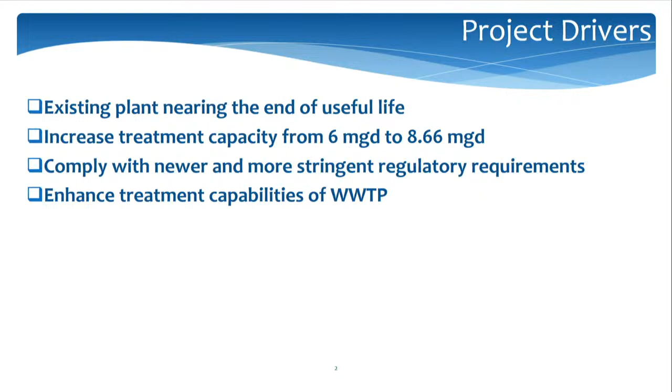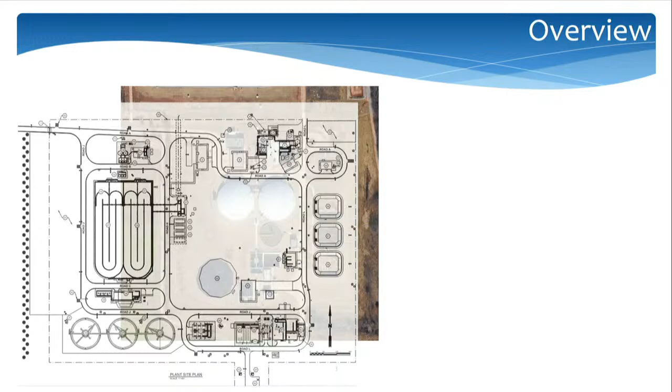And this, I think, was from about 2 or 3 months ago from Google Earth. It shows you that they've already started moving dirt, and you can see, if it'll show right here, the future aeration basins are already doing ground improvements there, and then making progress on headworks at this area. So that's a general overview.

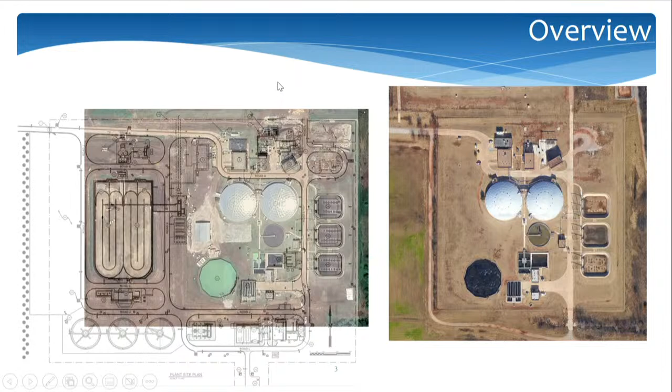Just a reminder, the engineer is CP&Y, now doing business as STV. The contractor is Crossland Heavy, and after making the value engineering adjustments, the total construction cost is estimated at just over $191 million. The project is going to last about 1,600 days. It's right at, I think, close to 5 years. We awarded the project in July.

They started last August, and the phase 1 milestone, which is in the contract, really coincides with bringing the new treatment processes online and being able to take effluent to the new discharge point. Phase 2 coincides with decommissioning and demolishing all the processes that are going to be abandoned. So the real major milestone is that first phase, where we actually bring the new treatment plant online.

So just a general update as of the first week of September through 12 pay applications. We've had about $42 million so far in progress payments, and we're tracking in terms of completion percent in dollars and completion percent in time overall. So the project's moving forward pretty well. We'll go through some pictures.

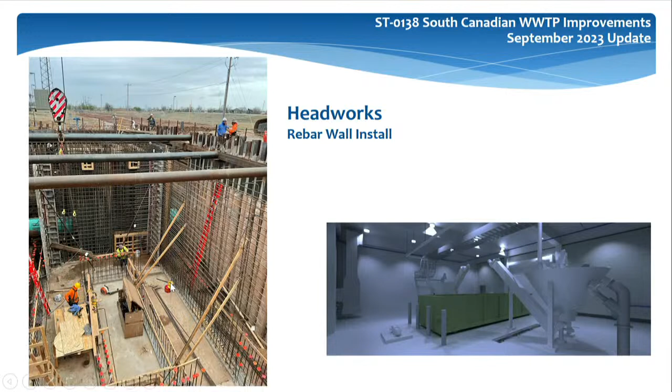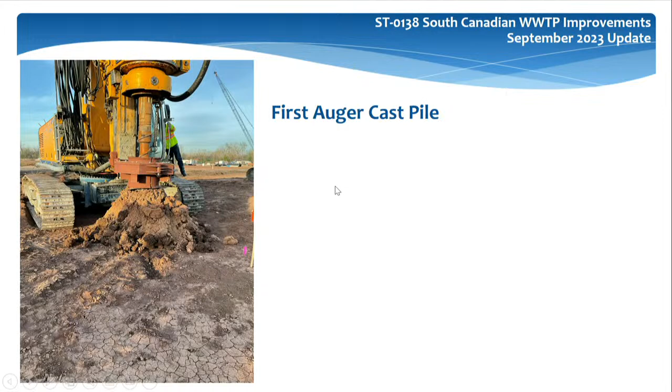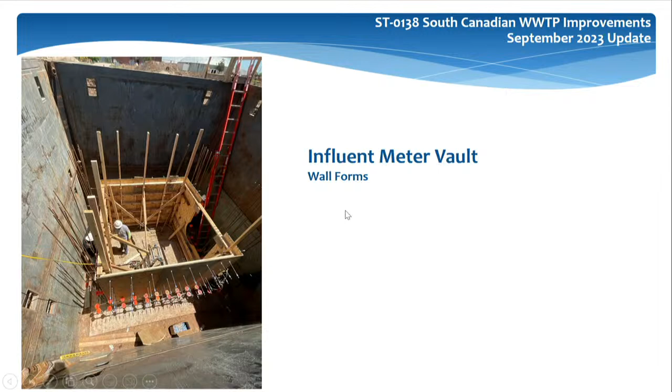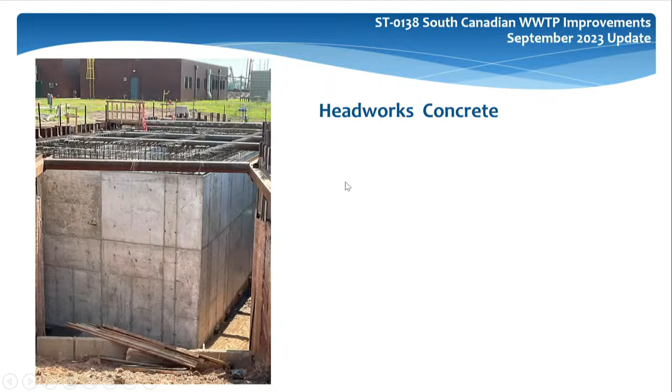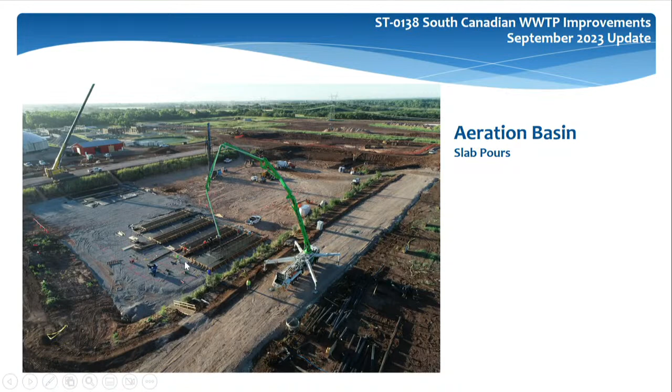And then this is headworks coming up out of the ground. They had poured concrete, and they were doing leakage testing as of a couple weeks ago, so the headworks should be moving along pretty well. Here shows the aeration basins, which I showed on the aerial. They had to do some preload of around 6 months, and now they're proceeding with the rest of the ground improvements. You can see here they're starting to pour concrete slabs.

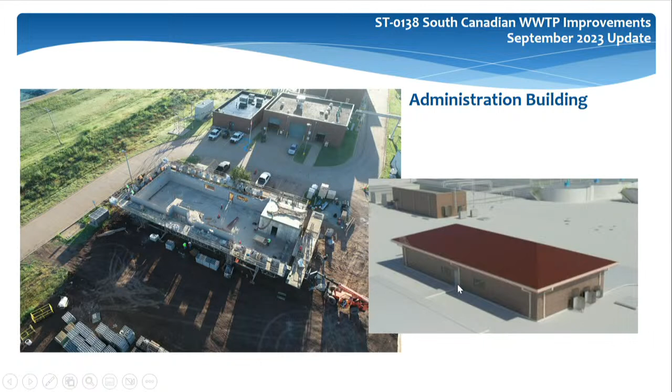This is the future administration building. On the right shows a rendering that was prepared during design, and this shows they've got the slab or the foundation poured, and they're starting to bring the masonry up out of the ground. So this will be neat as we move forward, to be able to show you how it compares to what we had in the design renderings.

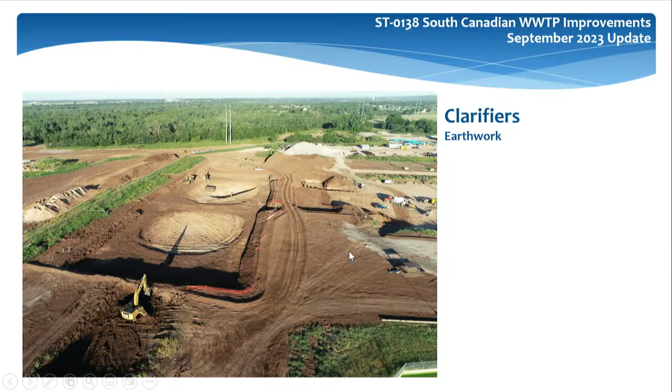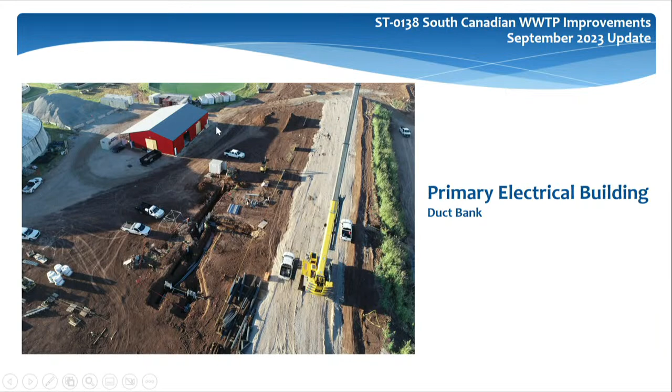These are the future clarifiers, really just earthwork at this point. They had prepped the area and got it loaded to stabilize the ground from settling before they actually started pouring foundations. The primary electrical feed to the plant is going to be coming in here, so this is the new duct bank and where a lot of the gear is going to be located.

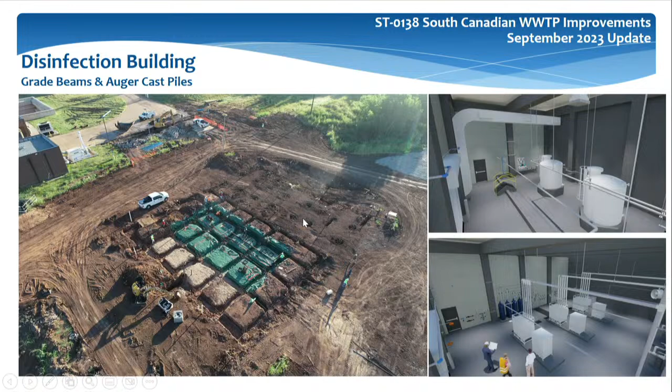This is for the new disinfection building. It's really at this point just ground improvements, getting ready to pour the grade beams, and they've done some installation of piles in this area to provide additional support. And then this was an overall view.

I just want to thank Crossland and CP&Y, or STV. Crossland provided a lot of the aerial drone type photos, and CP&Y, STV provided a lot of the first person point of view of actual construction. So with that, if there's any questions.

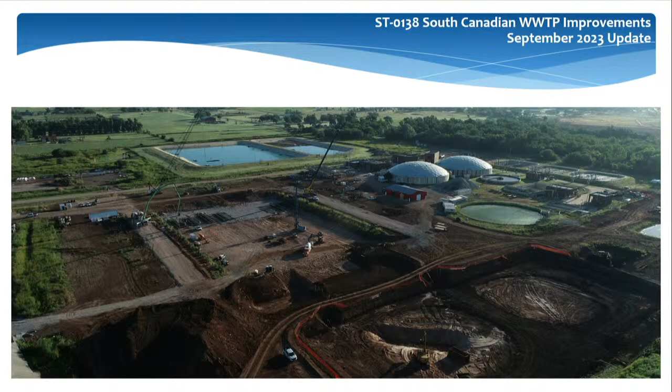I don't think I've ever been involved in a construction project that takes 5 years. It's a long one. All right. Other questions? Thank you, Will.

Thanks, Will. Next item is status report on the second Atoka pipeline. Larry Hare is here to give us an update. Good afternoon, everybody. How's everybody doing?

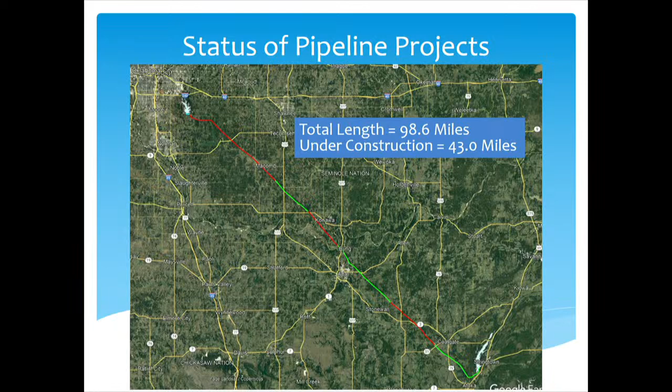Good. Out of the 9 pipeline projects and 3 pump station projects, I currently have about 43 miles in construction out of a total of 98.6 miles of pipeline. I don't have any pump station projects under construction as of yet.

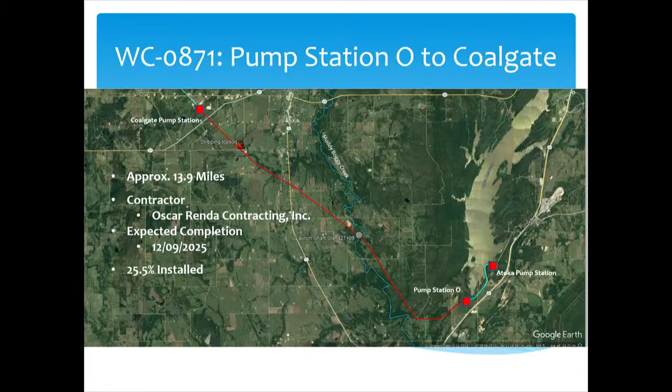Going roughly through each project, WC 871, which is from Pump Station O to Coalgate, I've got about 14 miles of pipeline. The contractor's Oscar Renda, and I've got about a quarter of it installed. For WC 873, I've got about 9.6 miles of pipeline. We expect completion on that in 2025, and I have about 1,100 feet of pipe on site.

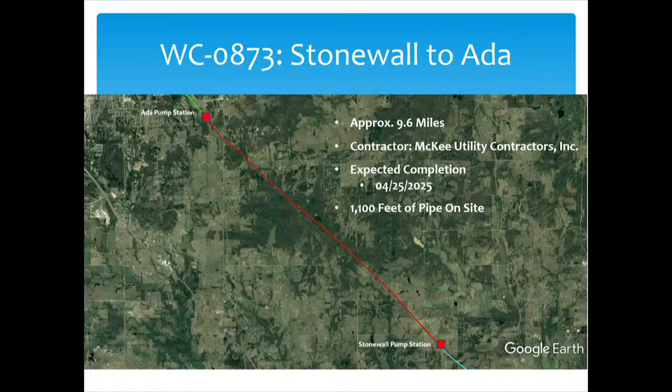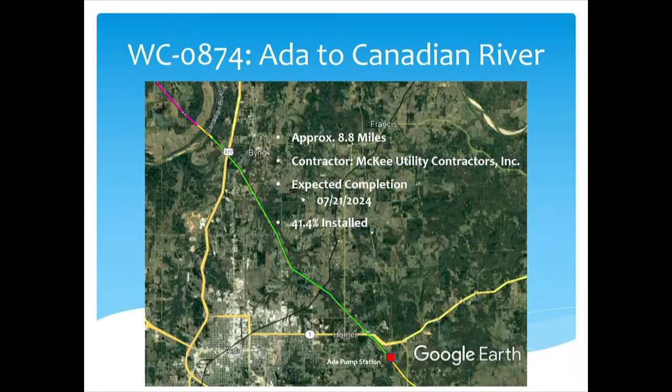WC 874 from Ada to the Canadian River is about 8.8 miles. I have about 41.4% installed in the ground. 875, which is the crossing across the Canadian River, where we're going underneath the river with a 72-inch and a 60-inch line, I have about 77.3% complete. All of the new 72-inch is installed under the river.

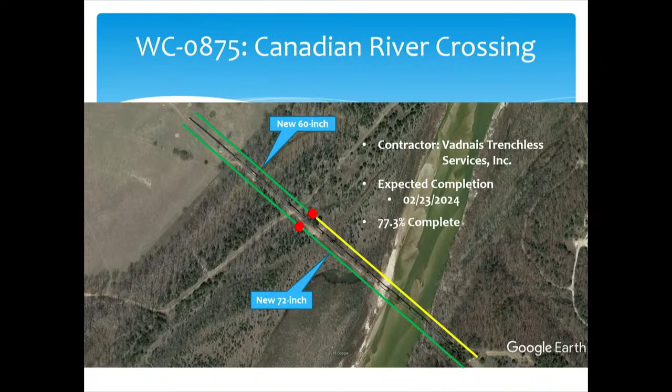877 from the Konawa Pump Station to just west of State Highway 3 West is about a 10-mile stretch. We expect the completion to be in July of 2025. The lay schedule is currently being developed in order to start laying the pipe. We recently received the lay schedule for the casing pipe, so we're about ready to issue a purchase order for that.

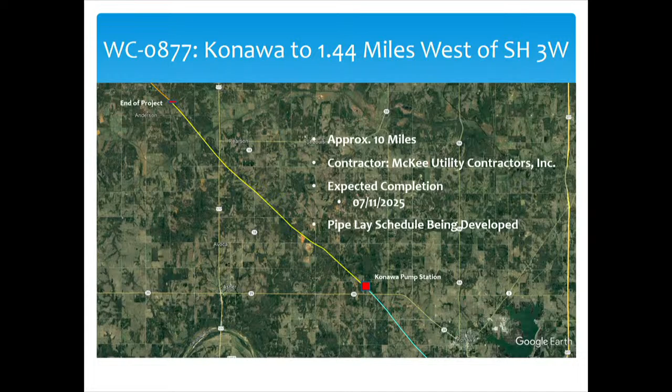Projects coming up next, I have 3 that are about ready to go. One is 876 coming from the river to the Konawa Pump Station. I also have WC 872, which is from the Colgate Pump Station to Stonewall, and also up, hopefully, will be the construction of Pump Station O, which is our starting point for the new Atoka pipeline. With that, I can take any questions.

Short and sweet. So are you having any delivery issues regarding the pipe with all the construction projects going on simultaneously? Some contractors are talking about a little bit of a delivery issue, but they're able to work it out with the pipe supplier. And McKee has 3 projects. That is correct. That's a lot. They're able to keep up with that? Yes, sir. All right.

Do we expect the installation of the second pipeline to create any issues on the water level for Draper? Hopefully, it will improve the water levels at Draper. I know it will once it's installed. I just wondered if there was anywhere that we were doing any work that would complicate the flow on the first pipeline. No, sir. Thank you. Well, they're minor.

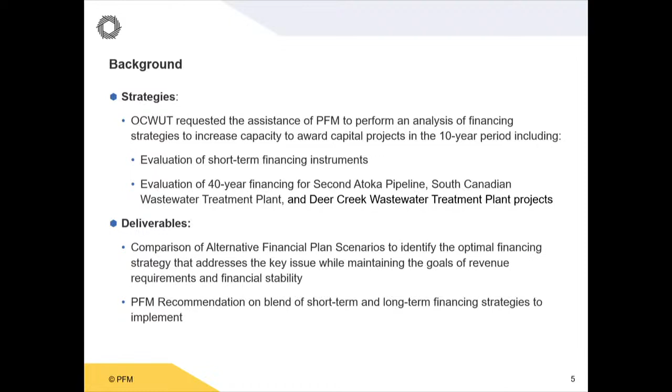So once again, the recommendation was to blend short-term financing with long-term takeout. So to look at what our challenge really is, we have a 10-year CIP from 2022 to 2031 of $3.4 billion. The largest individual project is Atoka, which is $925 million, or about 27% of the CIP. You also have Deer Creek at $171 million and South Canadian at $194 million.

And then you have a remaining CIP for projects other than those 3 large ones of $2.1 billion. And this is for renewal and replacement, water transmission and distribution, technology issues, asset management, which is proactive management of your infrastructure, as well as wastewater collection and distribution. So in addition to those 3 projects, you also have a lot of things that you need to do to keep the system maintained.

So the commercial paper program, it is maxed out at $275 million. The current credit facility with State Street expires in June of 2024, and it's time for us to issue a request for proposal for a new credit provider. So that will be coming in the near future to you.

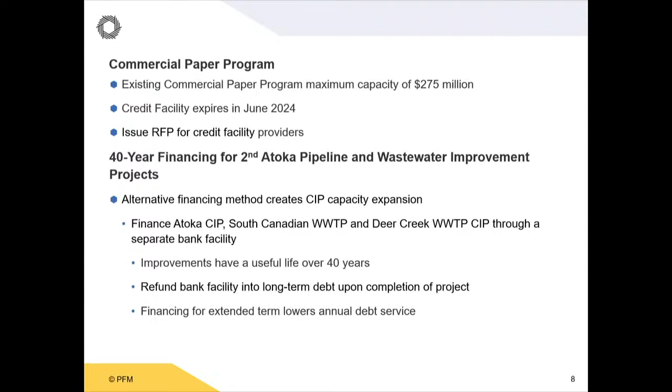So what is our recommendation? And this comes from our analysis. We want to increase the commercial paper program to $350 million to give the trust more capacity for projects. It will take about 4 to 5 months to go through that process of preparing, issuing, receiving back responses, evaluating, and then putting that new facility in place. By starting now, we'll be finished well before June of 2024.

We also recommend taking out outstanding commercial paper when we see it reaching approximately $100 million. If you take out the outstanding commercial paper, you put dollars back on your credit card that you can spend again when you roll that debt long. Another thing to consider is issuing new money when you do a commercial paper takeout, or reimbursing yourselves for any reimbursement resolutions you might have outstanding.

And the reasoning behind that is if you have known costs, if you know in the next 3 months you're going to spend $50 million, it's going out the door, we might as well go ahead and put it in whatever bond deal we're doing now, so that we don't tie up our commercial paper program immediately. In addition, by just doing one bond sale and putting everything together, you have efficiencies. You don't go out for ratings twice. You don't go out and get bankers twice.